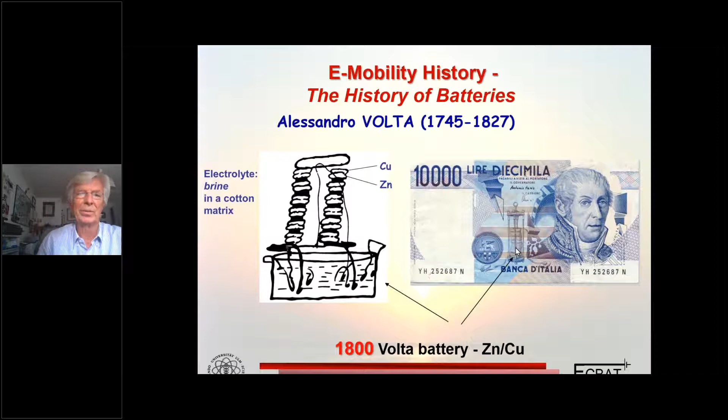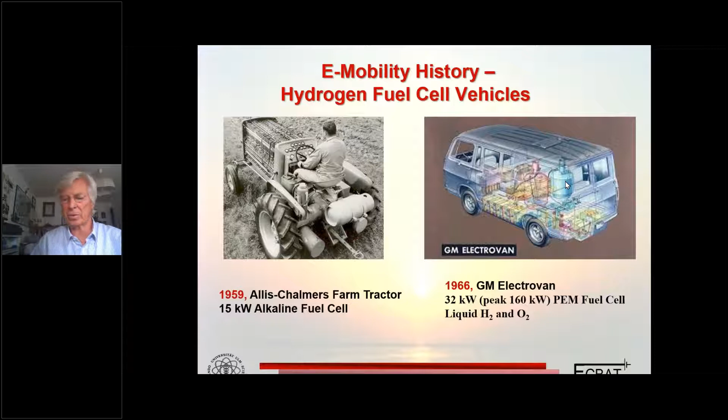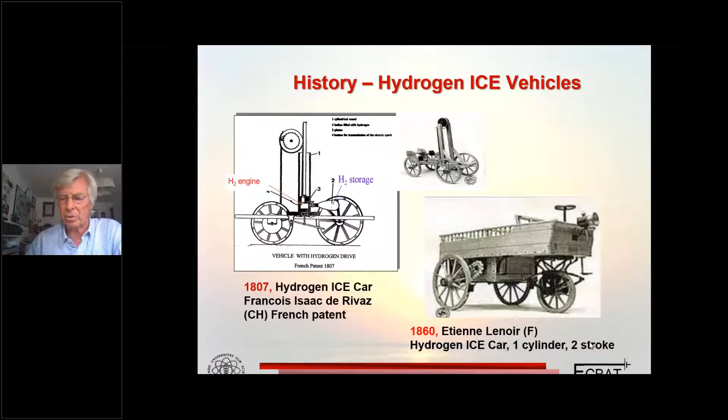Another history point is hydrogen internal combustion engine vehicles. You don't use gasoline, you use hydrogen, and the first patent for a hydrogen car was already in 1807. Later you can see that car from 1860, one cylinder, two-stroke. Interestingly, in that hydrogen internal combustion engine vehicle, the storage is here, the engine here, and the ignition of the hydrogen-air mixture was carried out by a Volta battery.

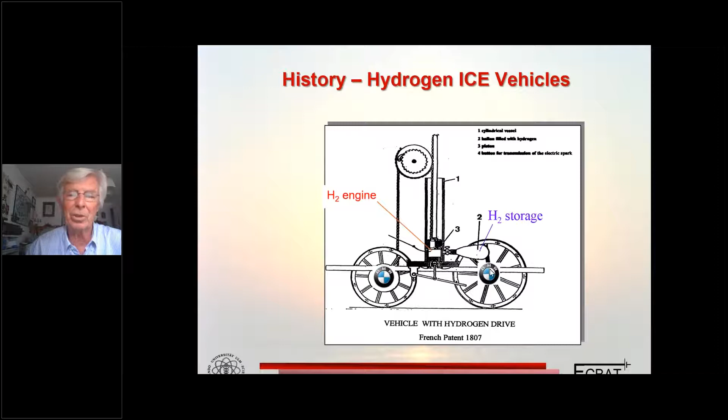A patent normally lasts 20 years, and those 20 years are over, and therefore BMW took over that principle, and about 20 years ago BMW presented hydrogen internal combustion engine vehicles. You can see here the principle of the 750 car. That is the liquid hydrogen tank, and that is the engine.

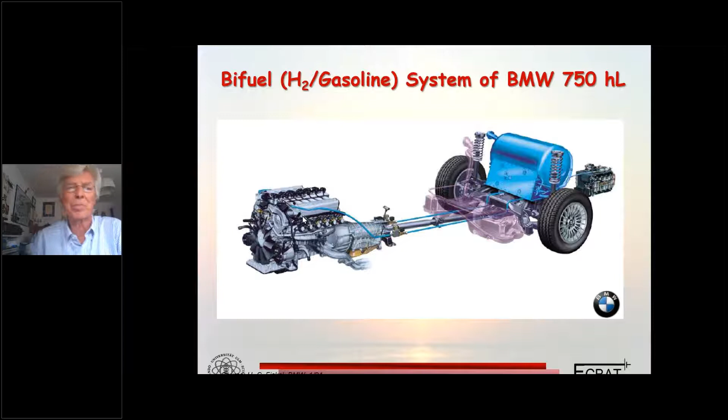And that means at that higher temperature of the hydrogen combustion, you have a higher content of NOx. And in order to reduce the NOx content, you have to reduce the combustion temperature. And that was done by injecting water into the cylinder of the engine. And that injection of the water reduced the efficiency.

So the maximum efficiency of that hydrogen internal combustion engine is 37%, and that is about the efficiency of the old diesel. And in order to come to 50% efficiency, the BMW people and MAN people and Volvo and so on, there are some car manufacturers which deal with that point, to come to higher values.

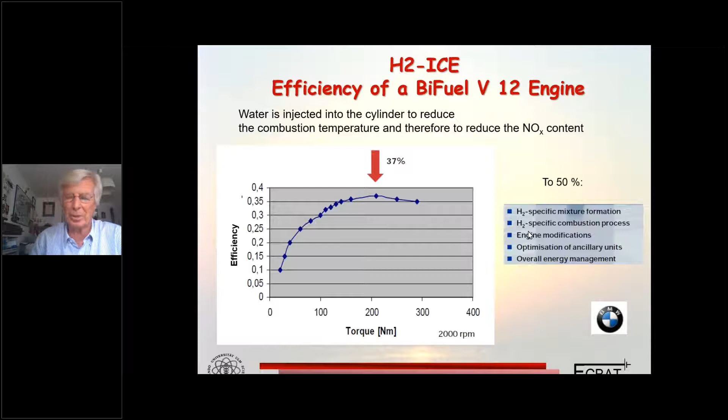They have specific mixtures of the hydrogen, oxygen, engine modification, but finally all car manufacturers stopped that way with the hydrogen internal combustion engine. So fuel cell working principles is the next topic. What is going on in the fuel cells?

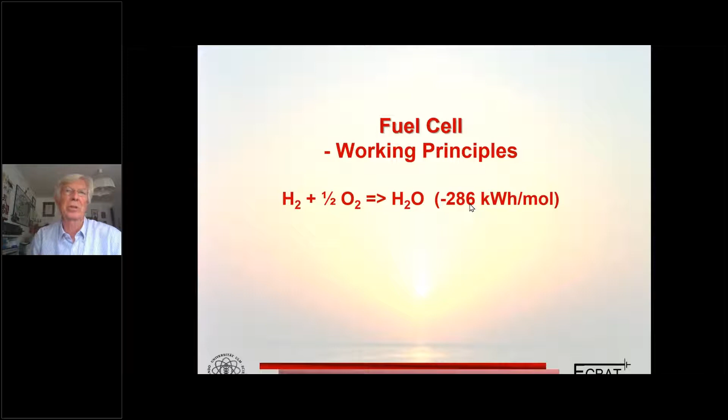The hydrogen and the oxygen react to water, and in that reaction large heat is developed. The heat is so large that normally you have an explosion in that reaction. The hydrogen-oxygen explosion, or the German Knallgas explosion. So what you could see here is that it's a direct chemical reaction. The hydrogen reacted with the oxygen.

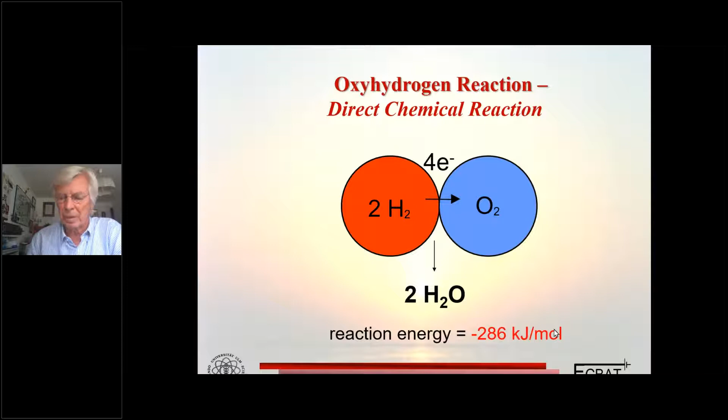4 electrons are going from the hydrogen to the oxygen, and you get that high reaction energy. That high reaction energy, unfortunately, is heat, or movement, and then electricity. That is the traditional way to produce electricity, and from the reaction energy, you get about 30 up to 40% for electricity. That is not too much, and therefore people have developed the other way.

That is not the direct reaction of the hydrogen with the oxygen. That is the indirect reaction. The electrons coming from the hydrogen are going via the load, it could be light or an electric engine, to the oxygen. And in that way, you could create much more electrical energy, about 83% theoretical, but in practice we are coming to 50–60%.

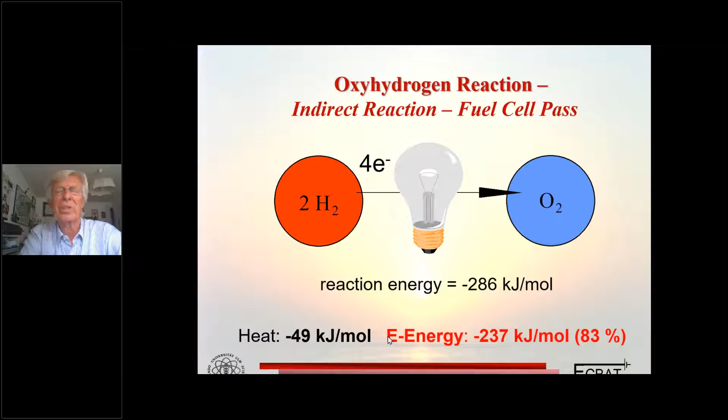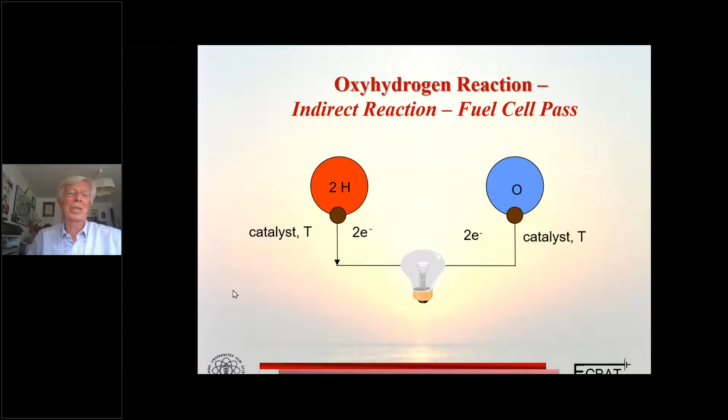So the big question is only how that fuel cell path is working. That works in the following way. You extract the electrons from the hydrogen with the help of a catalyst or with the help of high temperature. And those electrons then are going via the load and going to the oxygen, with the help of catalyst and also high temperatures. Again, electrons are extracted with the help of catalyst and high temperature, going via the load and going to the oxygen.

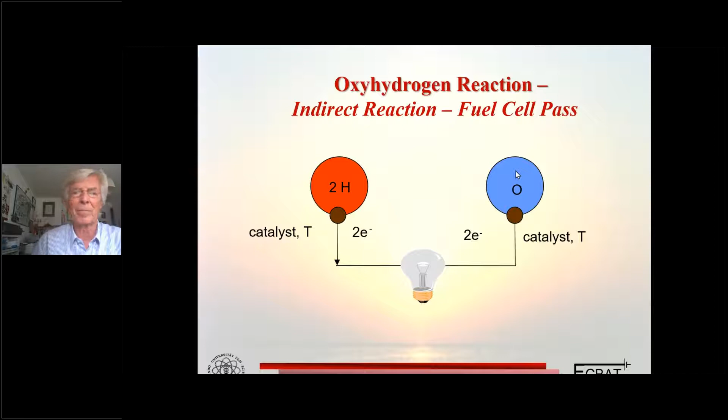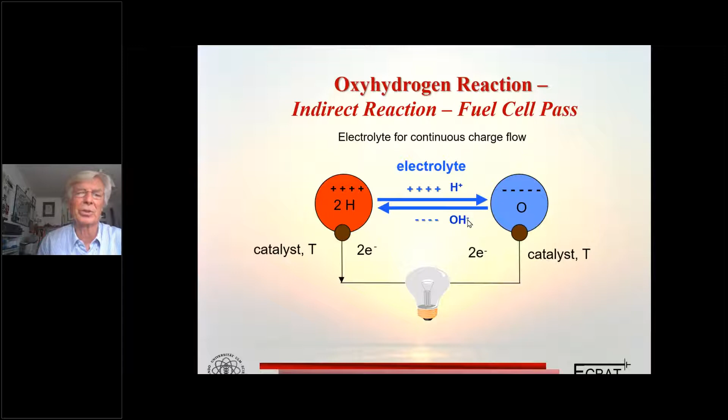So in order to have a continuous flow of the charge, we need, in addition to the electron flow you could see here, a flow of the charge through the electrolyte. The electrolyte is normally liquid, and the ions, the protons or the OH ions, are transporting the charge. By the way, that is the same working principle for the battery. What you have seen here for the fuel cells, that's the same scheme for the lead acid battery.

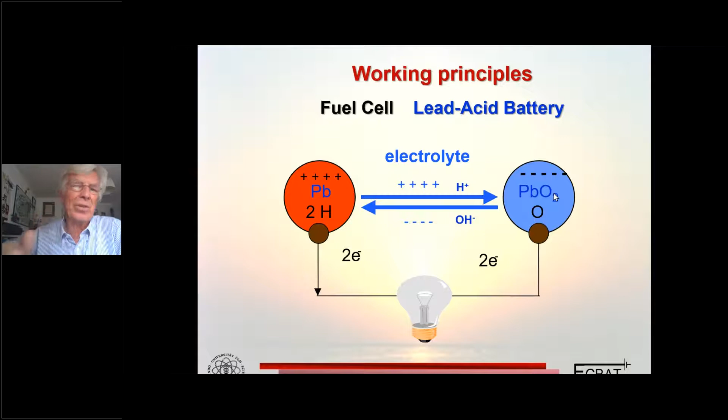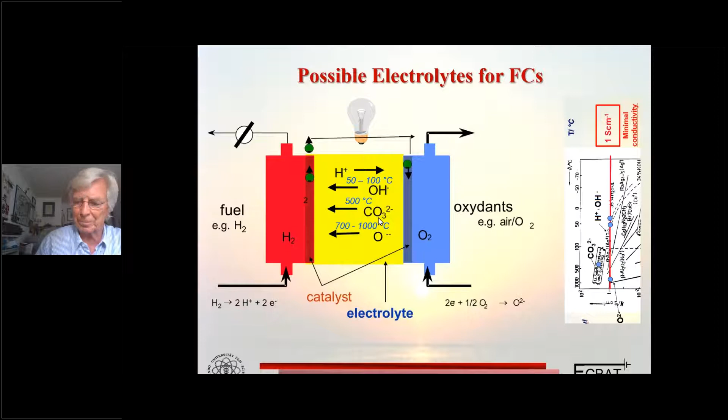So that brings you to the different fuel cell systems. Again, we figured out the 4 electrolytes with the 4 ions, and this oxygen ion, that is the basis for the so-called solid oxide fuel cell, SOFC. If we're using the carbonate, that is the molten carbonate fuel cell working at 650 centigrade. And if we are using electrolytes with protons or the OH, then you have the phosphoric acid fuel cell, the PEM fuel cell, and the alkaline fuel cell.

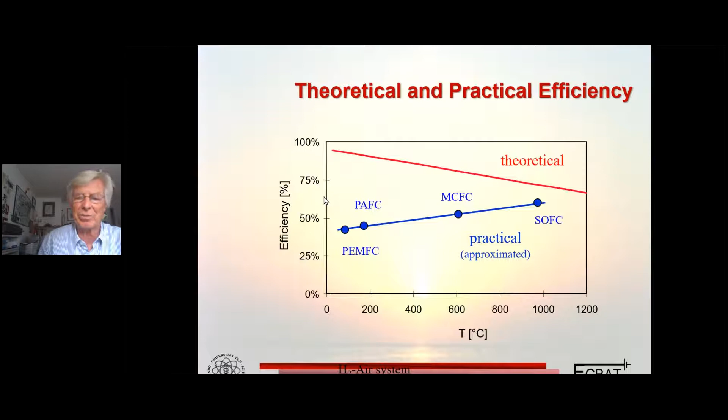That is related to lower resistance at higher temperature. So with the SOFC at about 1000 centigrade, you have about 60–70% efficiency. The other important point for these systems is the start-up time. For example, if you want to start a fuel cell vehicle, you could do that with the low temperature fuel cells in seconds, 10–20 seconds. But to start up SOFC systems, you need 1 day.

So the start-up time is growing with growing temperature, and the dynamics is growing with decreasing temperature. Dynamics means I want to change my speed from 50 to 100 km/h, and that is very easy with the low temperature fuel cells, but nearly impossible in short times with high temperature systems, because the temperature influences the ceramic structure, and if the ceramic structure is changed, then the lifetime is reduced as well.

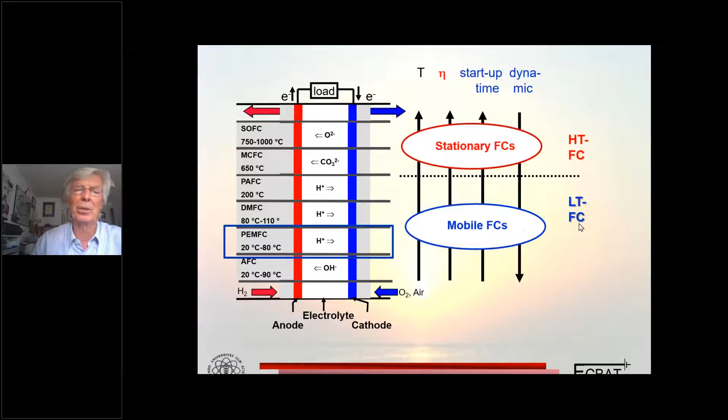So therefore, the high temperature fuel cells are used for stationary fuel cells. That means for utilities, for residential stationary fuel cells, for heating and electricity. And the low temperature fuel cells, with high dynamics, short start-up time, and not so high efficiency, are used for mobile fuel cells. And the most important of those three low temperature fuel cells is the so-called PEM fuel cell.

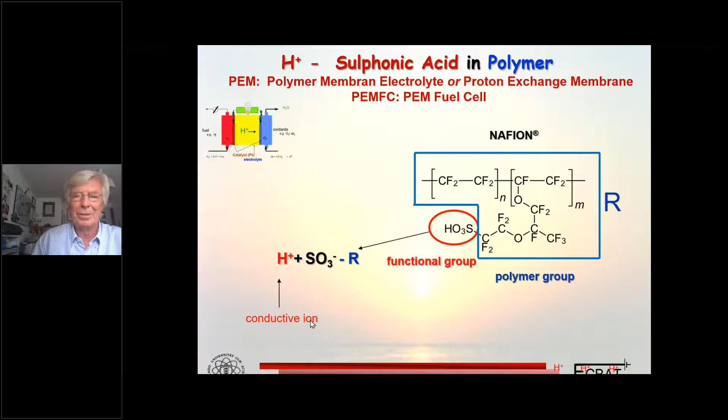The PEM fuel cell has a special electrolyte that is a polymer. This is sulfonic acid, so it's the acid in the polymer. That is the special sulfonic acid in the polymer. That is not so important. Important is that the polymer part gives the solid state, and only this one is the functional group, and the functional group is dissociated into the conductive ion. So only that ion is important for us, and that ion is created from that complicated chemical compound.

The voltage of the PEM fuel cell is in the region of 0.5 up to 0.7 volt. For example, the voltage of the lead acid battery is 2 volt, of the lithium-ion battery 3 up to 4 volt, but we need higher voltages in order to drive the car. What we could do is connect them in series for higher voltages. So we connect the anode with the cathode by an external wire. But you could also use that external wire as a kind of cell wall between cell 1 and cell 2. It is electronically conductive, and that is the so-called bipolar plate.

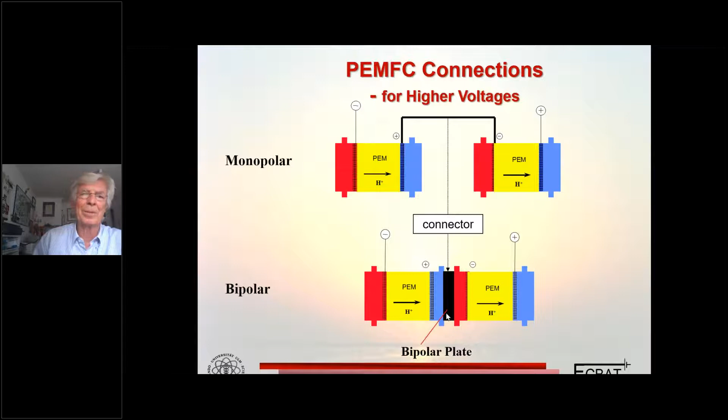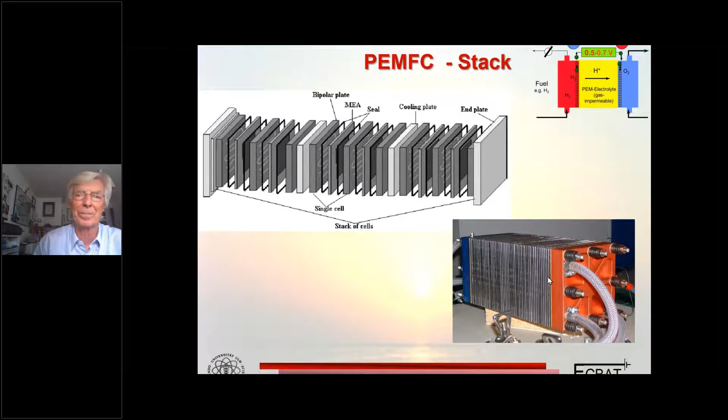And all the fuel cell stacks are built up not in that way, they are built up in the bipolar stack way. So you are putting your hydrogen anode part here, then you use the bipolar plate, and step by step you are coming to a PEM fuel cell stack, which you could see here, with a higher voltage. So that was the stack, and what you have seen before is here.

But for operating these stacks, you also need additional systems. The air has to be compressed, and the air has to be humidified in order to have a higher conductivity of the Nafion electrolyte. And then you have a second part, that is a hydrogen tank. For that hydrogen tank, you could use liquid hydrogen, a combination, or compressed gas.

Liquid hydrogen has the advantage of a high specific energy. You could store a lot of hydrogen per volume or per mass, but in the liquid state, that is about minus 253 centigrade, and you have losses by evaporation of the hydrogen at that deep temperature.

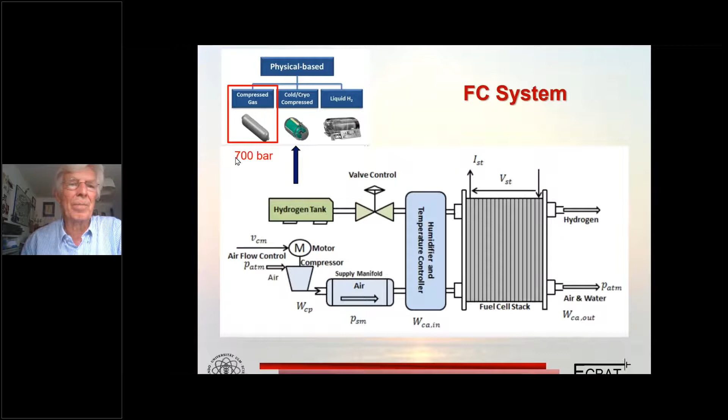So per day, about 2–3% of the hydrogen is going out of the system. That is the boil-off loss. And if you are on the airport parking for 2 weeks, then a lot of your hydrogen is evaporated. Therefore, now mostly the compressed gas with about 700 bar is used.

So, your fuel cell system is principally divided into the fuel cell stack with the compressor, humidifier, and so on. And that fuel cell stack gives you the power, gives you the kilowatt. And the energy of the system is given only by the tank, by the hydrogen tank. So you could increase the energy of the system only by increasing the volume of your hydrogen tank or the pressure of the hydrogen tank.

That is important because that is not the case in the battery. You could tailor the energy and the power. You have the choice to independently change the power at constant energy or vice versa.

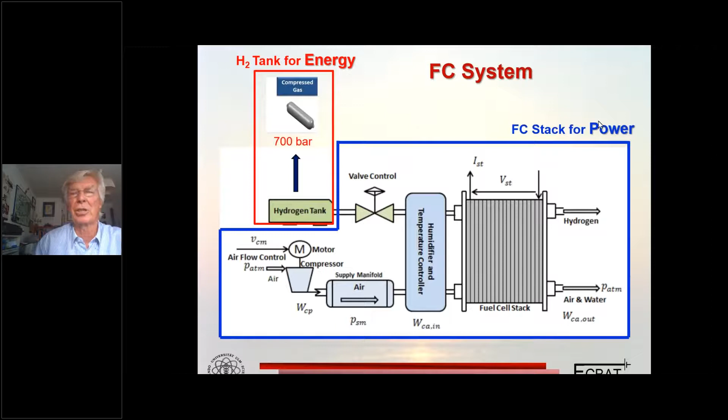So, finally, that fuel cell system is integrated in the car. You have the electric engine, or starting with the fuel cell stack, you put that here. Then the hydrogen storage tank, you put that here. And normally, a battery is also integrated in the fuel cell electric vehicle in order to recharge the braking energy. If you brake the car, then that energy is generated via a generator in the car into electricity, and that is stored in the battery.

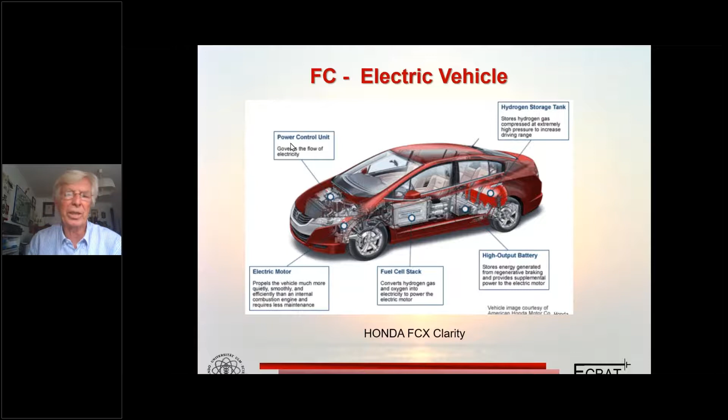And the battery also helps the car to accelerate in the beginning of driving. So you normally have in the cars a battery with about 1 kilowatt hour, and then you have the power control unit. That is the figure for the Honda Clarity.

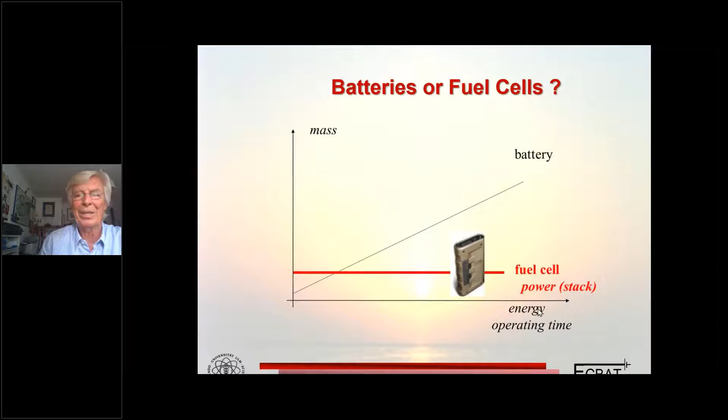So now the question: battery or fuel cell vehicle. That line gives you the energy or the operating time. If you need a larger operating time, you need a larger battery, so the mass is increasing. For the fuel cell, the mass of the power is the same. That is independent of the energy. Only the hydrogen tank is increasing. So, in order to see the whole fuel cell system, you have to add that.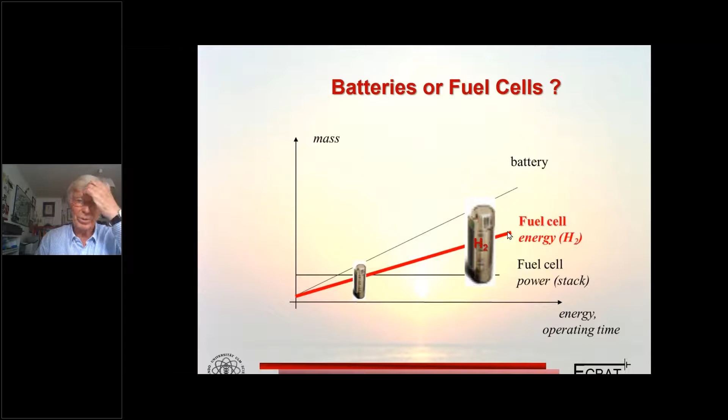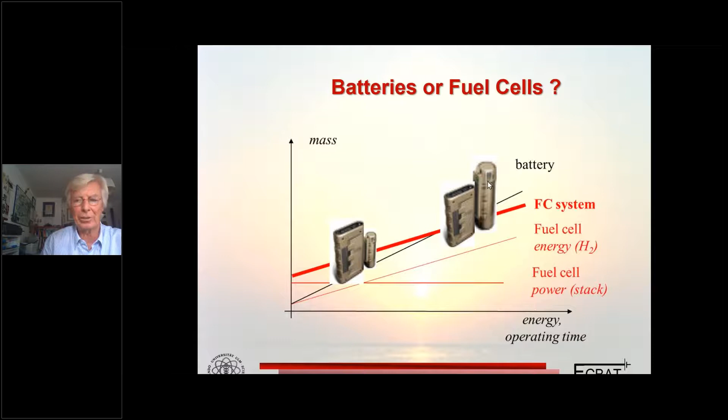And you could see for lower operating time, lower energy, you have the same fuel cell, but for higher energy, we have a larger hydrogen tank. So you could see you have a crossing point here. Before the crossing point, you have a lower mass of the battery, and after the crossing point, you have a higher mass of the battery. That means you have a critical time or critical energy. Before that one, the battery is your choice. So that means for short distances and also light cars.

And after that point, you have the fuel cell as the choice, and that one is for higher energy and higher operating times. That is for long distance cars and heavy cars. That is shown here. For example, that is the range. If you have a light car in the city, for example, here, that is the battery electric vehicle. If you come, also in the city, to larger cars, to heavier cars like buses, then you should use the fuel cell.

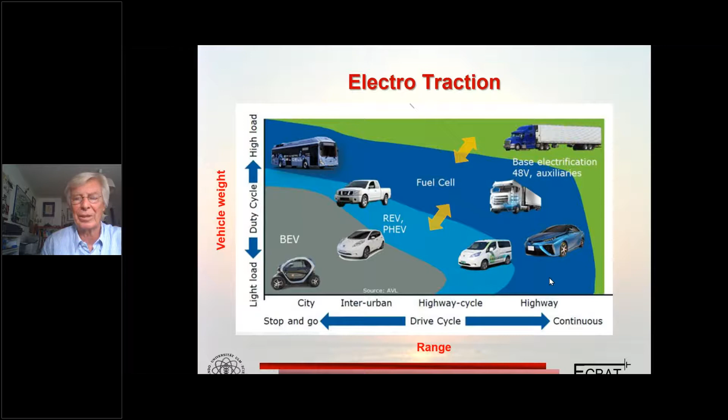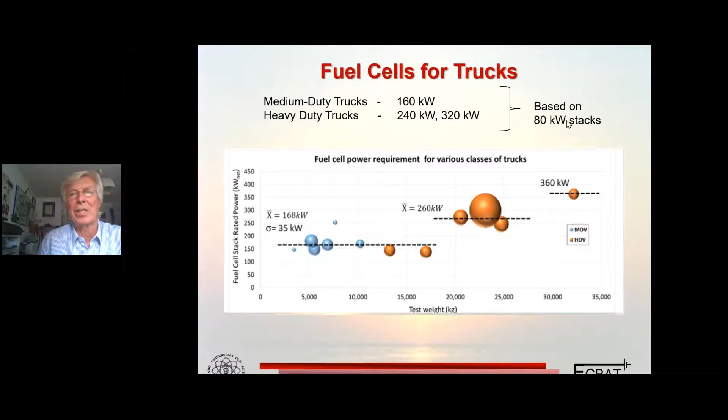It's the same with the distance. You could use such a small car, it's a battery car, but if you go to higher ranges, the highway, 400, 500 kilometers, then you need the fuel cell. So again, I'm going back. The battery is for short distances, light cars, and the fuel cell is for long distance and heavy cars. In the meantime, many manufacturers like Volvo and Daimler are now developing fuel cells for trucks, medium trucks, heavy trucks in that region, and that is based on the 80 kilowatt stacks.

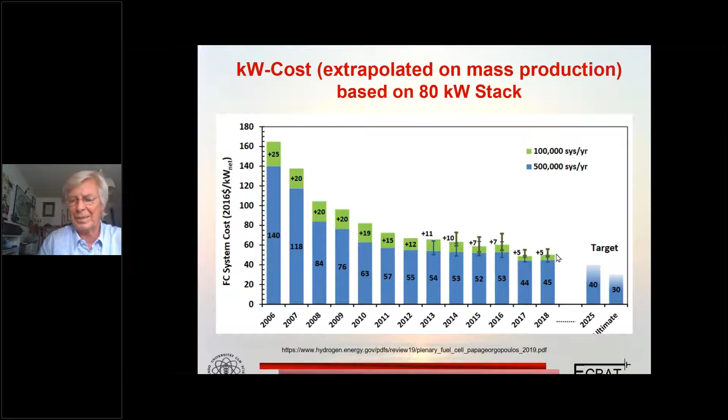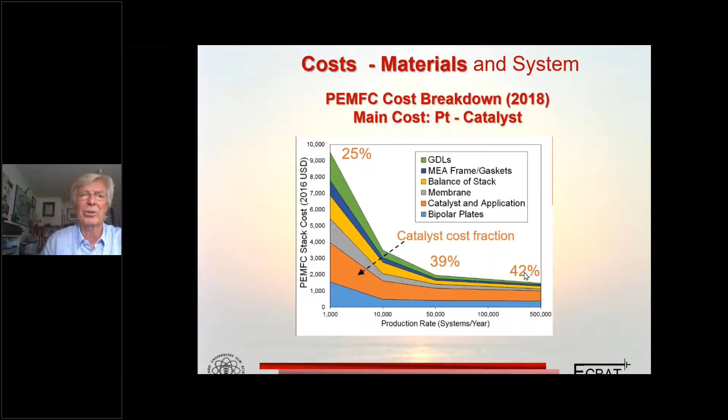So shortly to the cost, that is extrapolated for 80 kilowatt stacks, and you could see 2 years ago that was about $50 per kilowatt, and the largest costs are coming from the catalyst. You could see here, if you have higher production rates, then the catalyst costs are reduced, but they are still the highest part of the whole system. The costs are also coming from the fuel cell system. You could see here this is a very complicated system with electrons, oxygen, water, and the battery is much easier. The cost between the fuel cell electric vehicle and battery electric vehicle is a factor of 2.

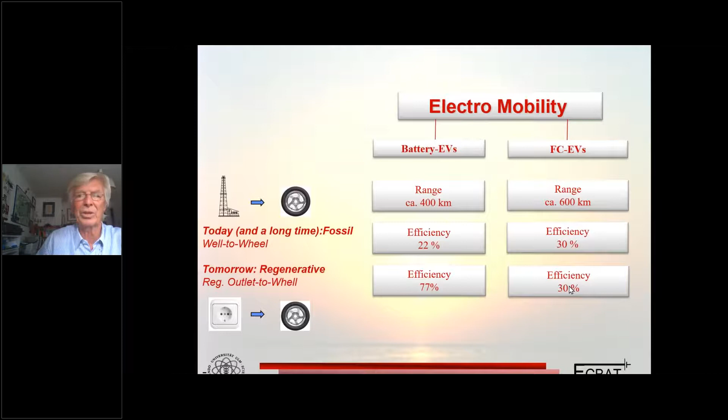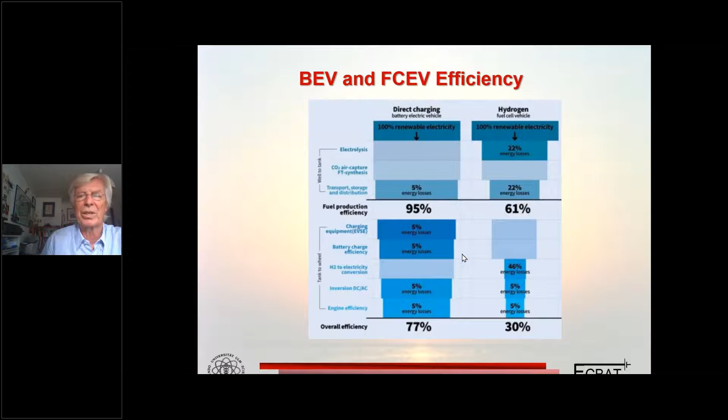So electromobility, at the moment, 400 kilometers for the batteries, for the fuel cell 600. If you look at the efficiency, the fuel cell electric vehicle in the fossil area is more efficient. In the regenerative area, the efficiency of battery cars is much higher than the efficiency of the fuel cell vehicle. You can see that here. The reason for that is the high efficiency of the battery. The efficiency of the fuel cell is only 50%.

And so you have the contradiction of range and efficiency, and so the car manufacturers are developing city cars with the battery and long range and heavy cars for the fuel cell. The status quo for 2018 is only 8,000 fuel cell cars but 5.5 million battery electric vehicles.

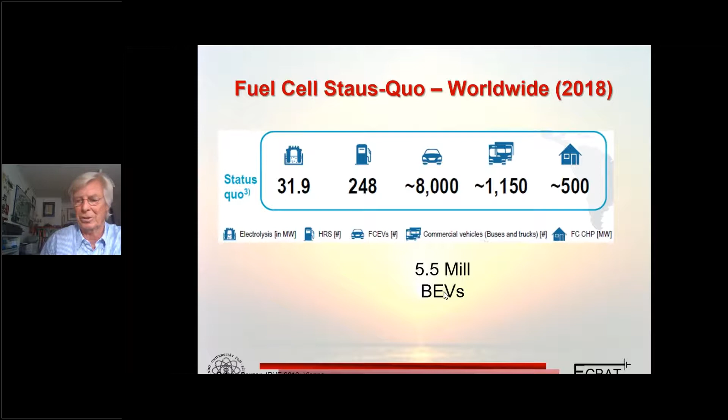So summary, that is the last one. We have no battle between the fuel cell electric vehicle and battery electric vehicles. The fuel cells are for long distance and heavy vehicles, and the battery is for shorter distance and lighter vehicles. And the market introduction for fuel cell electric vehicles is in about 5 up to 10 years. But the market introduction for battery vehicles, that is now.